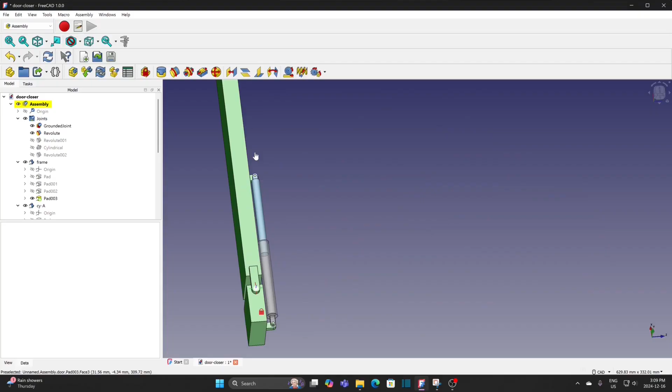This part will show how to create a door closer assembly. Create a new file, door closer.

In the assembly workbench, click the Create Assembly File icon. Now the assembly is active and the assembly heading is highlighted in yellow. Click the Insert Components icon to insert parts. Then click Open File and go to the directory where I save the parts. Holding the Control key, I can open all the parts files I need, or I can do it one by one.

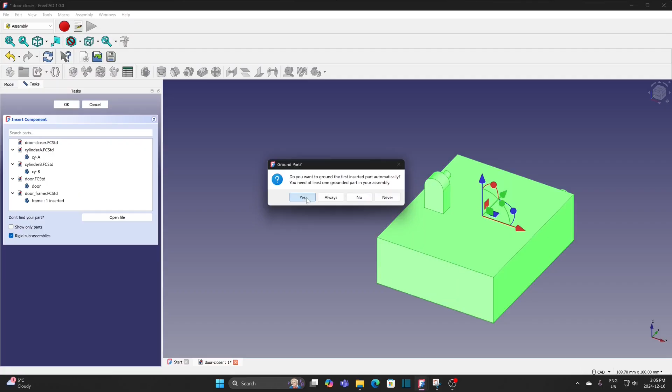Now all the files are inside the window. I select the first component and it will ask me if I want to ground the item. It is the same in A2 Plus Workbench, and I need to fix at least one component. So click Yes for now, and I can change it later if needed.

Then select the remaining items, or I can do it one by one so there will not be too many items at one time. Anyway, this is a simple assembly and I just insert them all at once. Now I can move the parts freely by the mouse. It is a good practice to save the file after I insert items. If I didn't, sometimes it may not work in creating the joint. Saving the file will update the link between files.

Select the circular edge on the door and the circular edge at the frame, select Revolute Joint. Use the arrow icon to flip the direction if needed, then click OK. The door can freely rotate. Make it to the 90-degree position.

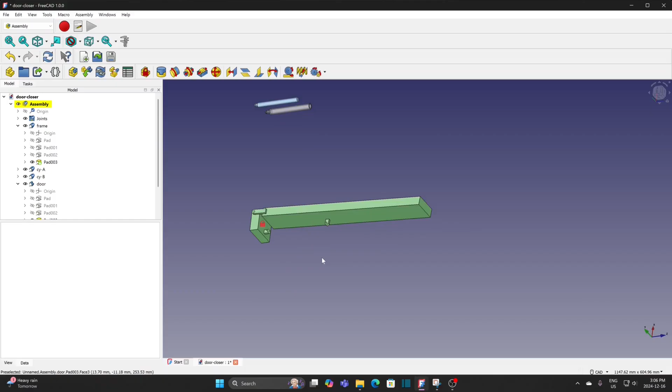Select the circular edge at the cylinder A and the frame, and create a Revolute Joint. Rotate the cylinder to the right. Insert the rod into the cylinder. I can use the circular edge or the circular surface to create the cylindrical joint, so the rod can slide and rotate inside the cylinder.

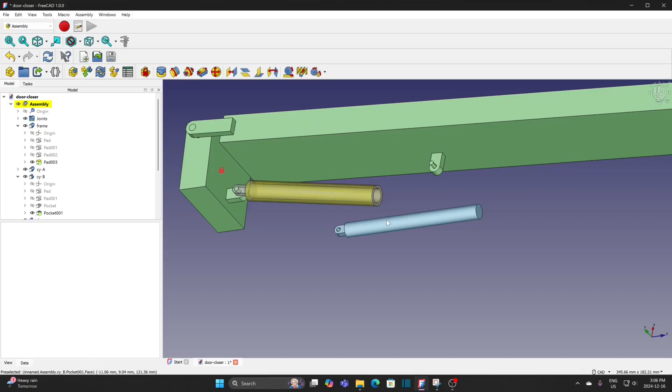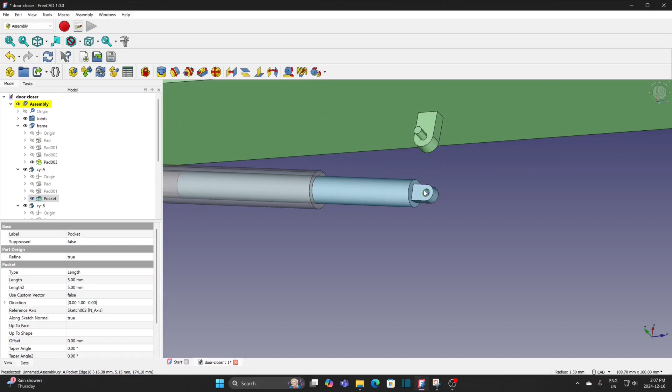Click the Cylindrical Joint icon. Use the arrow icon to flip it. I can slide the rod now. Select the circular edge at the rod and the door to create a Revolute Joint. When I move the door, the cylinder will move correspondingly.

Open the tree of the joint. The first, Revolute Joint, is the frame and the door. When I move the door, you can see the values in minimum and maximum are changing.

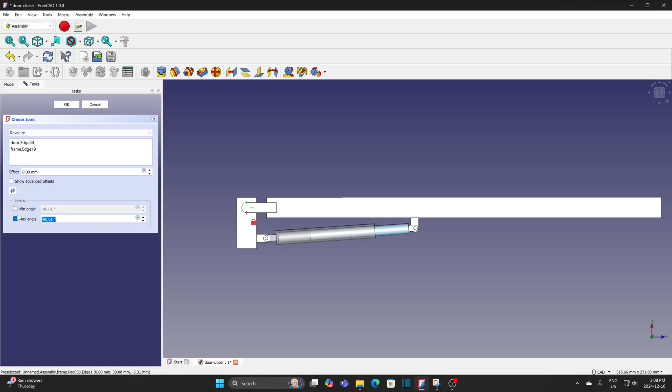Check the minimum angle and I cannot swing it outward, so this should be the maximum angle. So check the maximum angle and uncheck the minimum angle. Change maximum to -90 degree. Move the door outward and the minimum angle is changing. Check the minimum angle and change it to -180 degree.

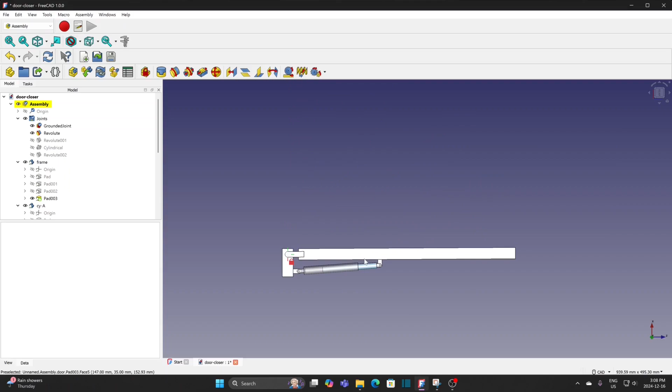Now the door can be moved within the defined range. This example is the basic operation of assembly in FreeCAD 1.0 with revolute and cylindrical joint.

The second part is to create a Scotch-Yoke assembly. Create a new file Scotch-Yoke. In the assembly workbench, create the assembly file, then insert components. Hold the Control key to select all the files needed, or you can do it one by one.

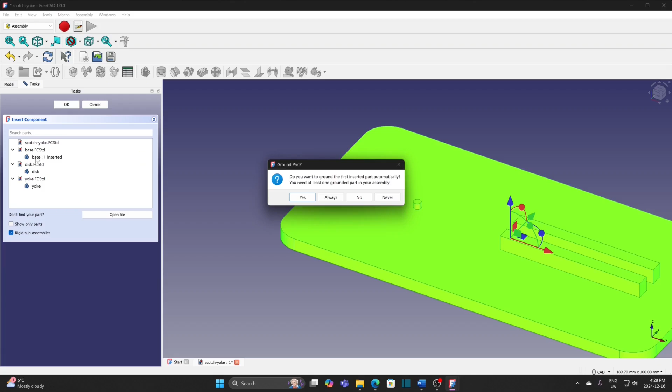I will fix the base, so I insert it as the first item to ground it to. Then insert the disc and the yoke. I can move the parts freely except the base, where you see a lock at the base indicating it is grounded or fixed.

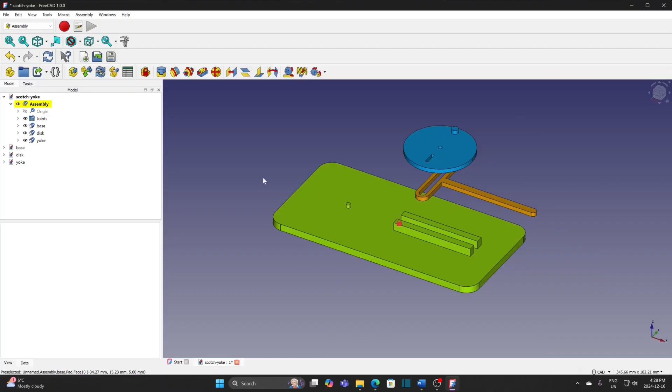The first joint is a slider joint. Select the edge of the yoke and the line at the base, click slider joint. The yoke can slide along the base, but no limit is set.

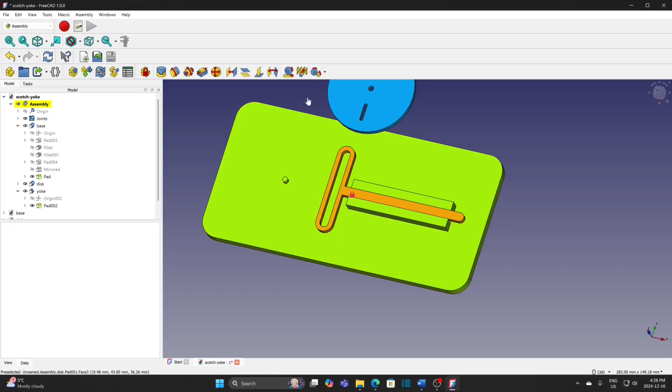Now set up a revolute joint for the disc. Select the hole at the disc and the circular edge of the pin, then select revolute joint.

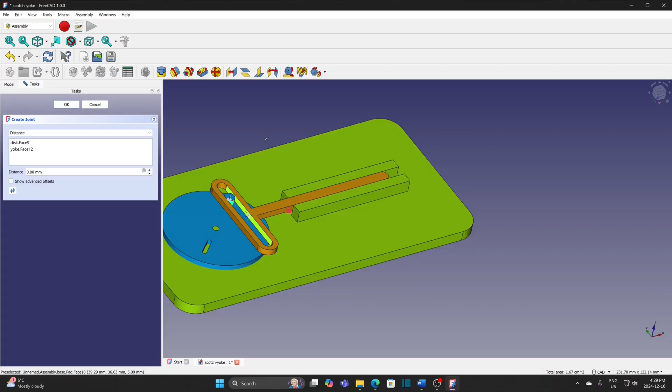Next step, to constrain the yoke to the disc, the pin can only move within the yoke. Select the circular side surface of the pin and the inside surface of the yoke, then create a distance joint. Set the distance as 0 so the two surfaces are touching. When I move the yoke, the disc will rotate.

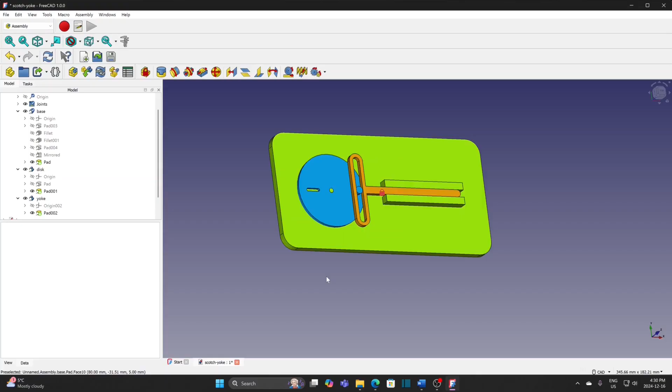When I rotate the disc, the yoke will slide. The operation is similar to A2 plus Workbench 2. I didn't set up the min-max for the slider, however the sliding range is limited by the disc, so I don't need to define the range. The Scotch-Yoke assembly is done, let me move to the next one.

This part is for Pinion and Rack. Create a new file for Pinion Rack. In the assembly workbench, create the assembly file. Insert components, open file, and go to the directory of parts. Select files needed.

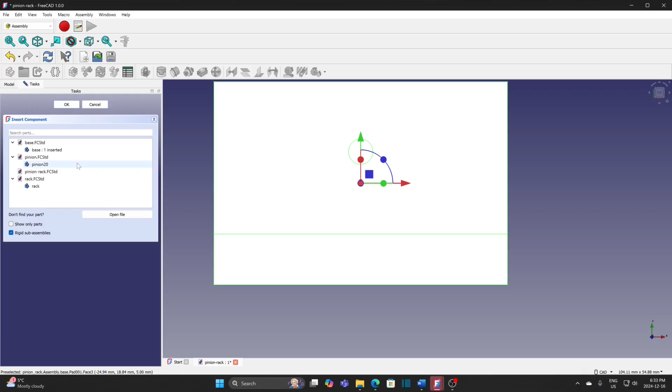Open the first file, which I plan to make stationary. Select the base, click Yes to ground the first item automatically. Insert pinion. Insert the rack.

Create revolute joint with the base and the spur gear. Select the hole and circular edge of the pin, click revolute joint. Select a line of the rack and the line at the base, then create slider joint.

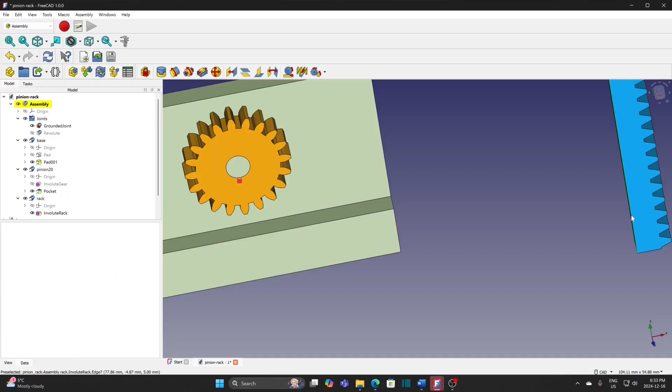Gears don't mesh. I can either slide the rack or rotate the gear to mesh them. Slide the rack to mesh the gears.

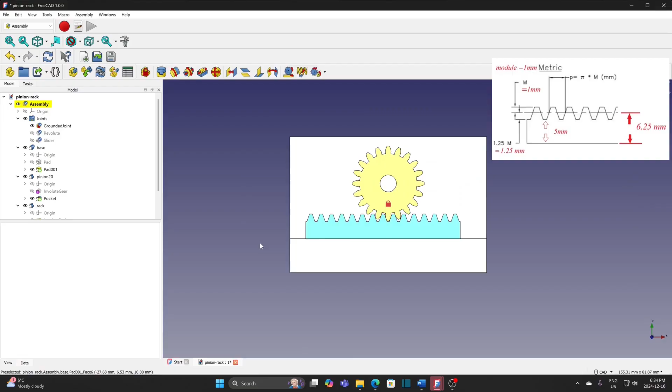The pitch radius of the pinion is 10 mm, the module is 1 mm. So a line 1.25 mm from the root of the rack should meet the pitch circle of the pinion. The base of the rack is 5 mm, so the imaginary line is 6.25 mm from the bottom. So the distance between the pin center and the platform for the rack is 16.25 mm.

Select the line at the rack and the hole of the gear to create a joint between slider joint and revolute joint, which results in the pinion and rack joint. The pitch radius refers to the pitch radius of the gear. In fact, I would say it is half the number of teeth of the gear, because with different modules the radius would be different, but the speed ratio of the gear to the rack stays the same.

In this example, I use 1 mm for the module, so it is 10 mm, or 20 teeth. Move the rack slowly. Now the gear and the rack mesh. We can also set up the min-max for the slider joint, which controls the range in the pinion and rack joint eventually.

In some cases, the rotation direction may be wrong. Open the data window of the pinion and rack joint, and change the distance to minus, which could reverse the direction.

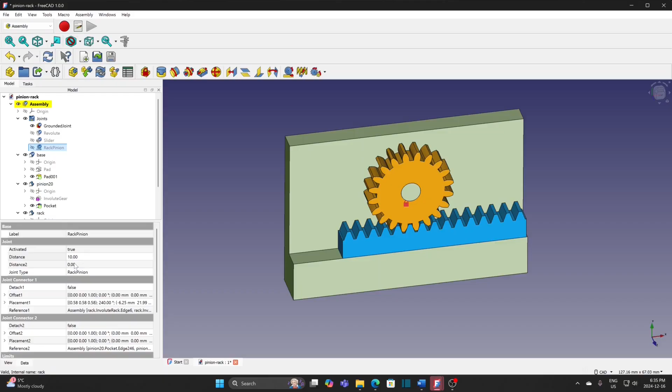This one is for spur gear. Create a new file. Within the assembly workbench, create the assembly file. Insert component, open file. Select parts file.

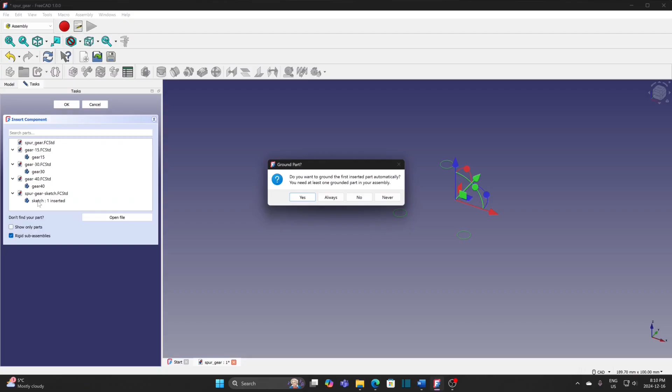Insert the sketch as the first item and make it fixed in position. Besides the 3D body, we can insert a sketch, using it to fix the position of bodies. Then insert 3 gears.

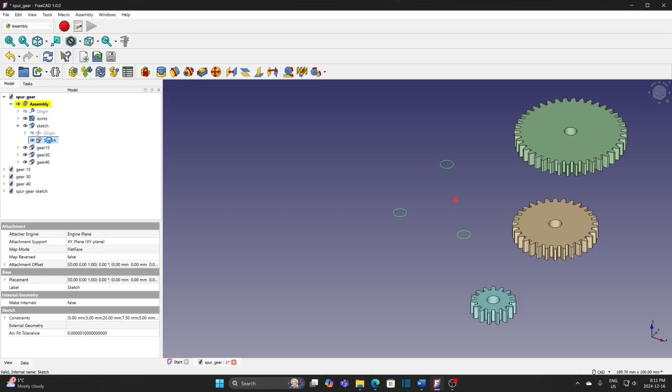Open the sketch and we'll explain the mounting distance between gears. The first small gear is 15 teeth, the second one is 40 teeth, and the third one is 30 teeth. I use 1 mm as the module, so the pitch diameters are 15 mm, 40 mm, and 30 mm. Mounting distance is the sum of the radius of 2 gears, so the first pair is 27.5 mm and the second pair is 35 mm.

Make sure the assembly is active, otherwise all the assembly icons will be grayed out. Double-click it or change it to active.

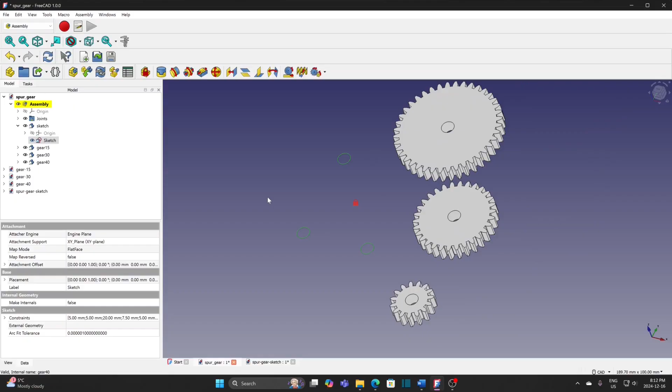I will create a revolute joint between the gear and the circle at the sketch. I can select the circular edge at the top or the bottom, just make sure it is consistent with all 3 gears. Select the bottom edge and the circle at the sketch, click revolute joint. Repeat it for the other 2 gears.

All the gears mesh, as gears will be inserted with the axis aligned with the axis of the sketch, and sometimes we don't need to adjust the angle. If it doesn't mesh, rotating the gear by half a tooth would usually work—that is 180 degrees divided by the number of teeth. But in this example, it is good to go to the next step.

Gear joint is to set up a relationship between two revolute joints, so select two revolute joints and define the gear ratio. Select the circle of the first gear and the circle at the second gear, click Gear Joint.

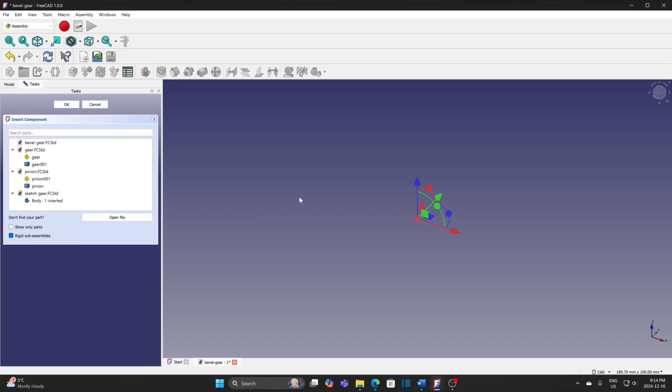Create a new file. Create assembly file. Insert components, open files of components. Insert the sketch first and ground this item. Insert the pinion and gear.

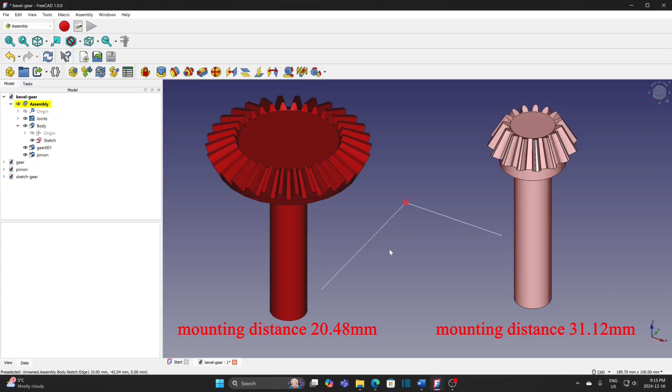The mounting distance of the pinion is 31.12 mm and 20.48 mm for the gear. If you want to find out details of getting the mounting distance of bevel gear, you can see bevel gear assembly 4 animation in my channel.

The length of the line is double the mounting distance, as I attach the gear to the center of the line. If the line is the same length as the mounting distance, I will attach the gear to the end of the line. Either way is fine.

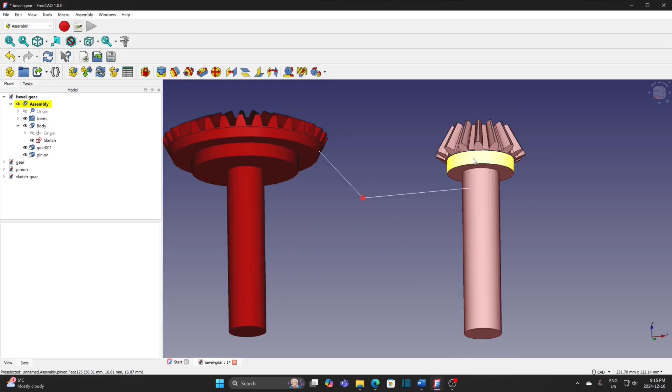Select the longer line and then select the circular edge of the pinion. Apply revolute joint. Same for the gear.

Select circular edge of the gear and then the pinion. Create gear joint.

Enter 30 for radius 1 and 15 for radius 2. These are the number of tooth.

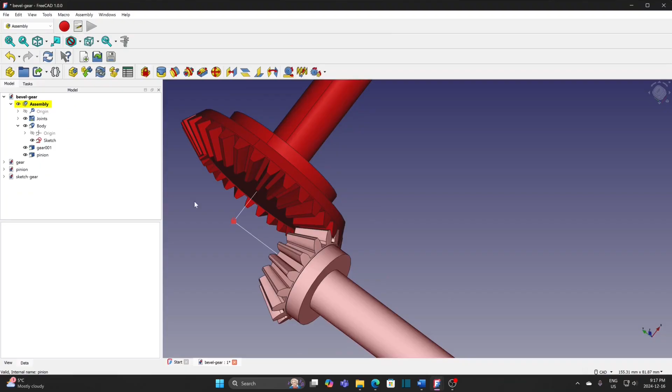The gears mesh. Rotate a gear to test it. The direction is wrong.

Go to the gear joint. Change distance to -30, which is radius 1. Direction should be correct now, but the gears don't mesh anymore.

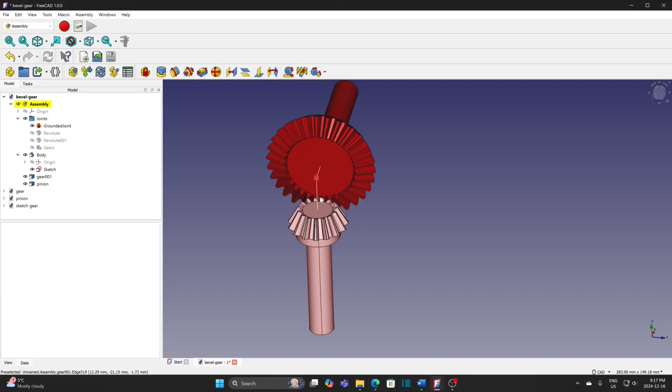Go to the first revolute joint, advanced setting. Rotate the angle. Because the gears rotate in the wrong direction and I cannot calculate the exact angle to fix it now, I will trial and error to get the correct mesh.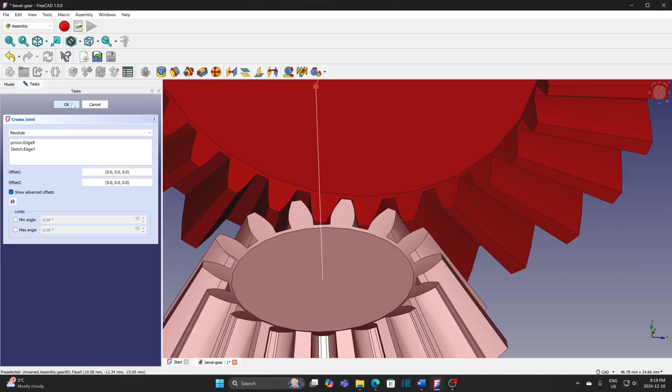Rotate a gear to test it. It looks okay. Hide the sketch and it is done.

Belt joint is to relate two revolute joints by the radius ratio, so basically it is the same operation as gear joint. Create a new file.

Create assembly file. Insert components. Open files of components.

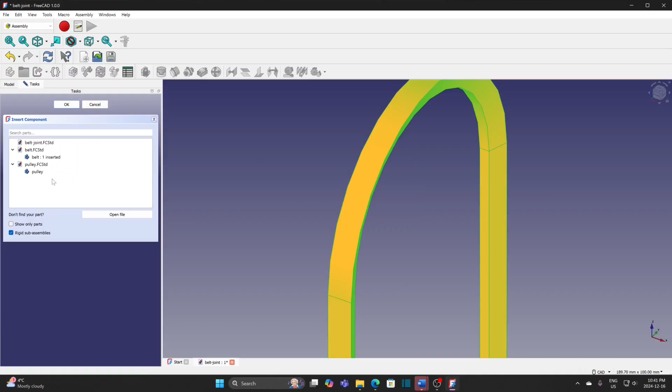Insert the belt first and ground this item. Insert the pulley twice, as I use two same pulleys for the example.

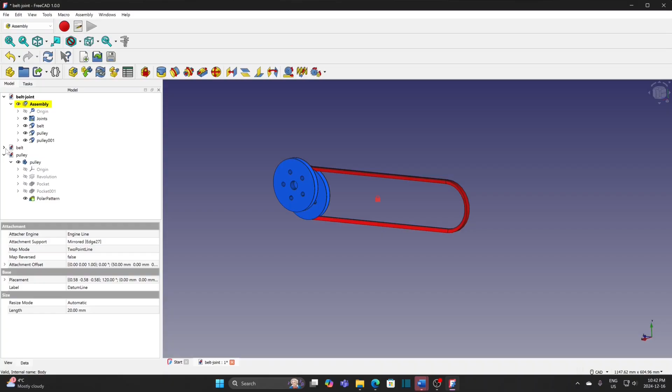As the pulley is a little bit bigger than the belt and the circular edges are not at the same plane, I can select the circular edge and adjust the position based on the dimensions of the belt and pulley. However, I can select the curved surface instead, so the belt will seat right at the middle of the pulley.

Select the inside curved surface of the belt, and then select the round surface of the pulley. Apply revolute joint. Do the same for the other pulley.

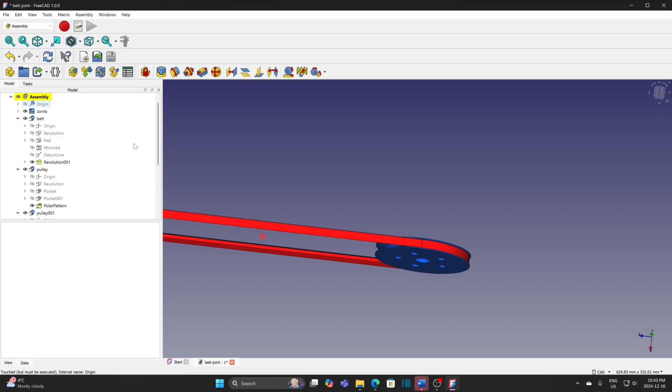Then select circular edges of two pulleys. Apply belt joint. Enter the value of radius 1 and 2.

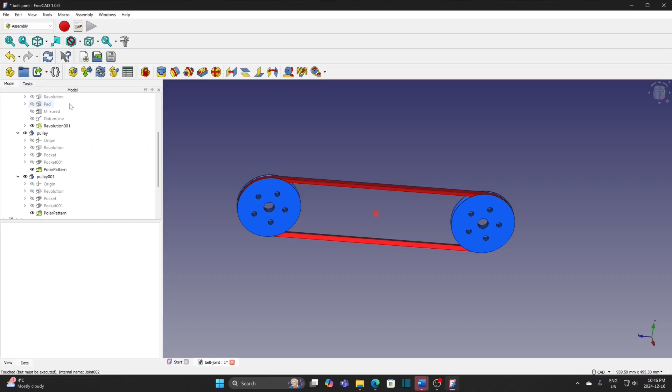Rotate one pulley will move the other pulley, and it animates a belt drive motion.

I will create a simple example for ball joint and it is similar to a hexapod. Create a new file.

Create assembly file. Insert components. Open file. Select components.

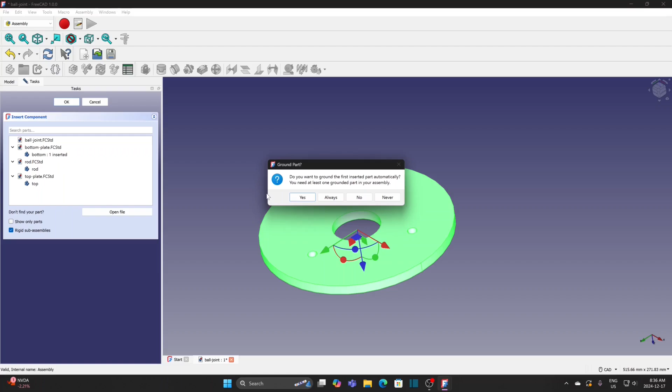Insert the bottom plate first and ground this item. Insert the rod 3 times. Then insert the top plate.

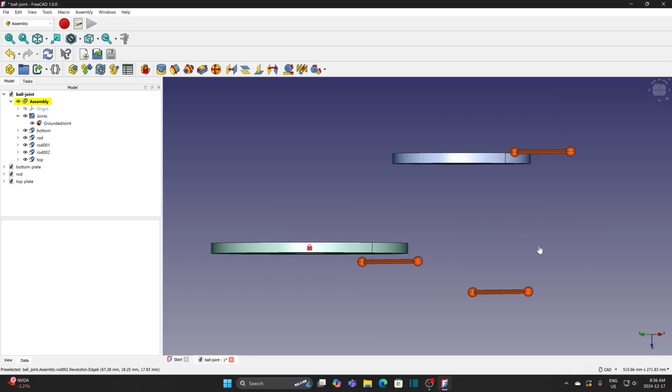Rotate the top plate.

Select the ball at the rod and the concave part at the bottom plate. Create ball joint. Do the same for other 2 rods.

Then create ball joints for the rod and the top plate.

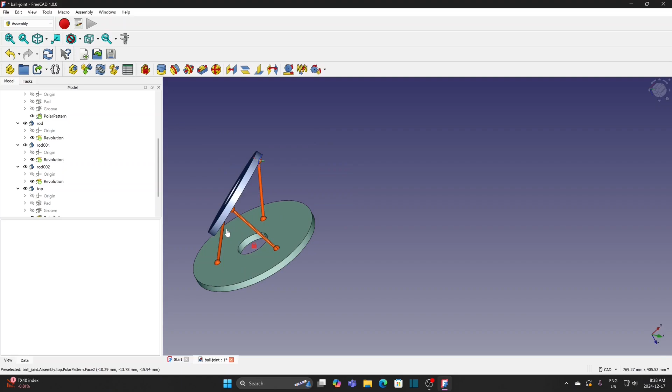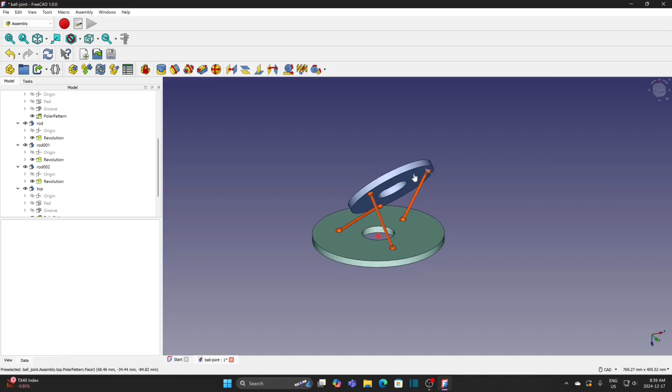All done. Move the top plate and we can see the movement of the rod. We can use this joint with 6 rods to create a hexapod, something like this.

This section is to create a linear actuator. A motor drives a threaded rod which in turn moves a block to the desired position. Create a new file.

Create assembly file. Insert components. Open file and select the motor and the base.

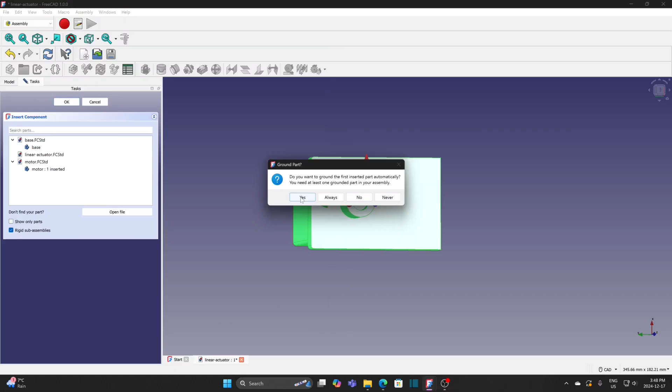Insert the motor as the first item and ground it. Insert the base.

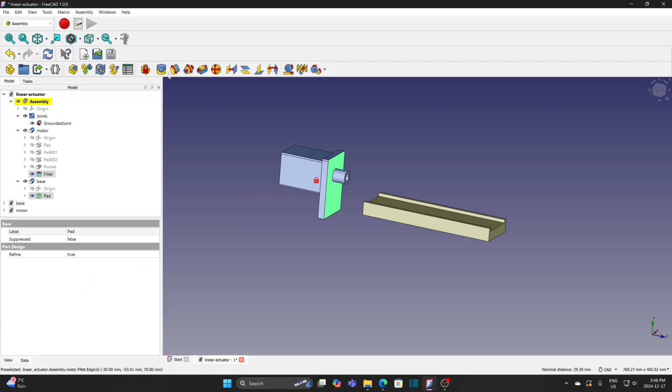Select the surface of the base and the surface of the motor. Create fixed joint. The base is fixed to somewhere at the center of the motor.

Show advanced offsets. Select offset 1 to open the translation tool window. We can use the translation tool to position the base. Adjust the distance at Y to align the base with the motor plate.

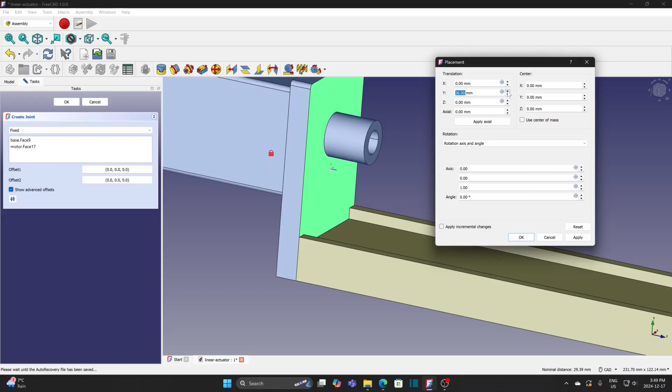Then insert the threaded rod.

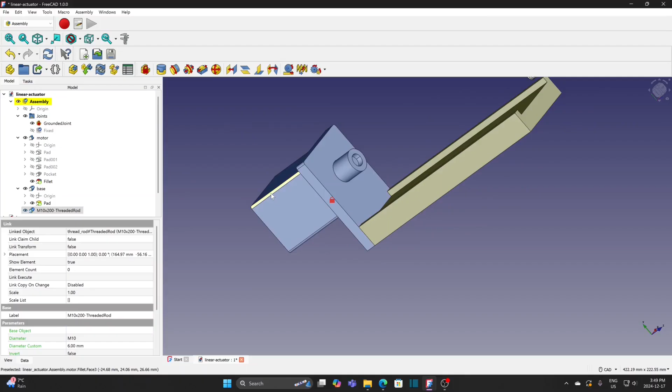Select the circular edge of the threaded rod and the circular edge of the motor. Create revolute joint so the threaded rod rotates at the motor.

Insert the motion block which is threaded at the hole. Always select the last item in the body, it is the cut for the motion block.

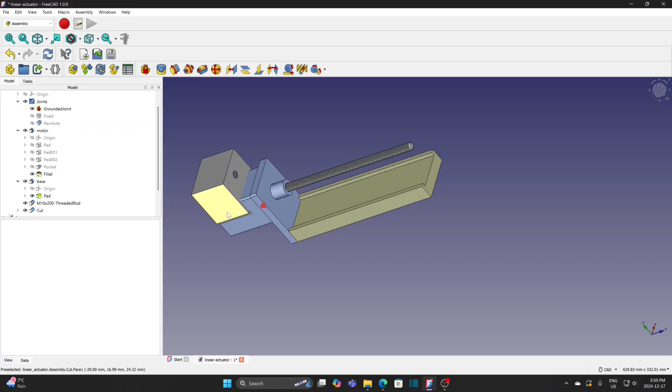Select the edge of the block and the edge of the base. Create slider joint.

The position is good and the threaded rod passes through the motion block at the hole.

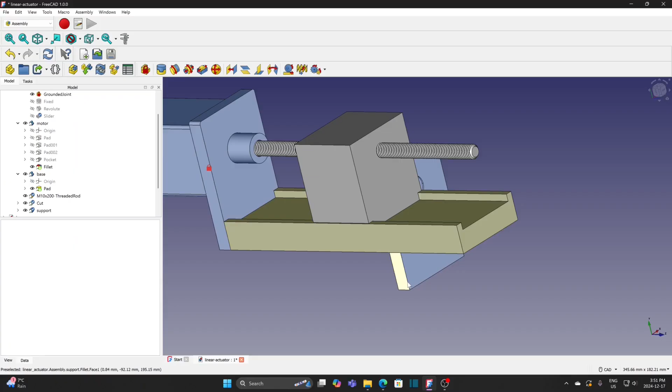Insert the support plate. Rotate the support plate.

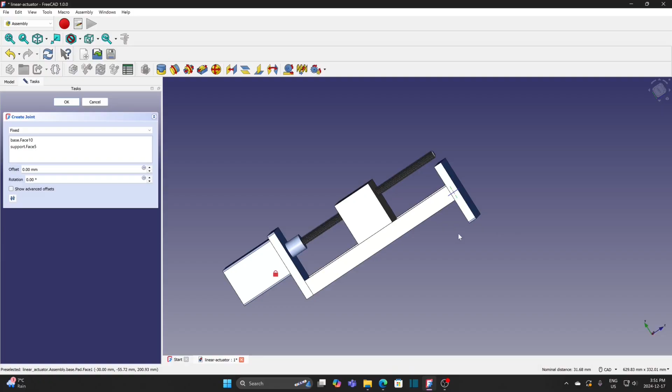Select the surface of the base and the surface of the support plate. Create fixed joint. The plate is upside down and attached to the middle of the base. We can fix both by using advanced offset.

Show advanced offset. Select Offset 1 to open the translation tool window. Change the angle to 180 degrees. And adjust distance in Y.

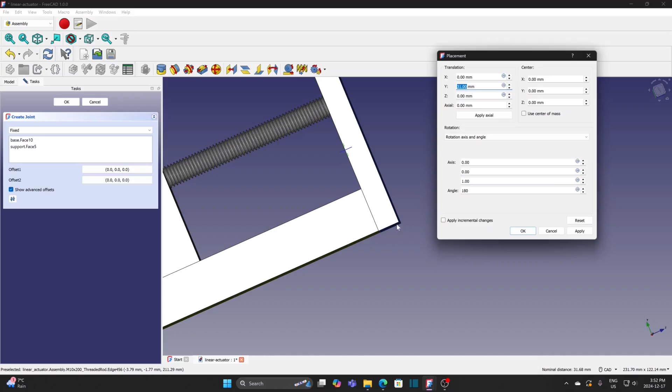Change the color of the block to amber. To create a screw joint, we need to relate the revolute joint and the slider joint.

Hide the support plate. Click the block, go to View, and change transparency to 80.

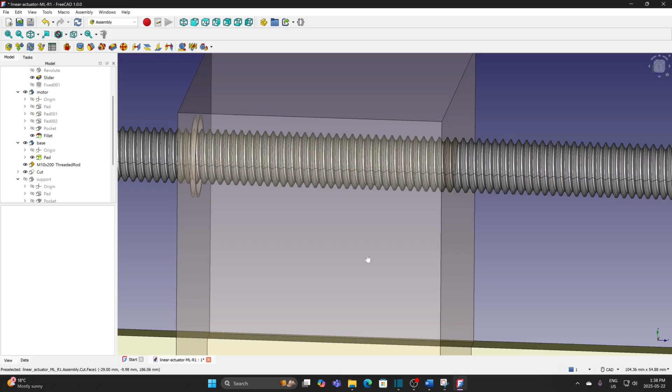Move the block to match the thread of the rod. Select the block and change transparency back to 0. Select the line at the block and the circular edge at the threaded rod, then create the screw joint.

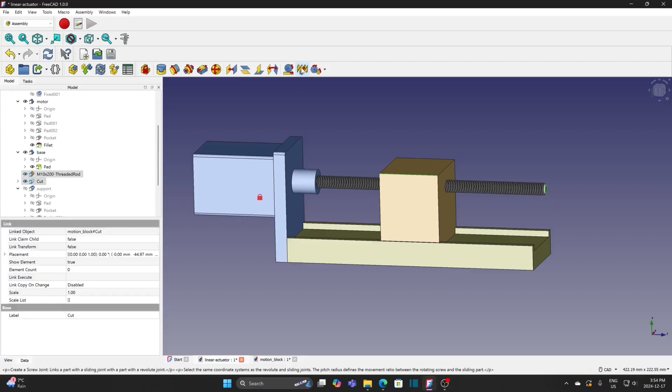The pitch radius is in fact the pitch of the threaded rod. It is the distance moved when the screw makes one complete turn. For M10 thread, the pitch is 1.5 mm.

Show the support plate. Move the block and you can see the threaded rod is rotating.

Open the slider joint. Move the block and the values in min-max are changing. Move it to the left and check the max length. Then move it to the right and check the min length. This is the range the block can move.

Zoom in on the threaded rod and you can see the rotation of the threaded rod. I can rotate the threaded rod to move the block, or move the block to rotate the screw. But in this example, it is easier to move the block to show the interaction between these two components.

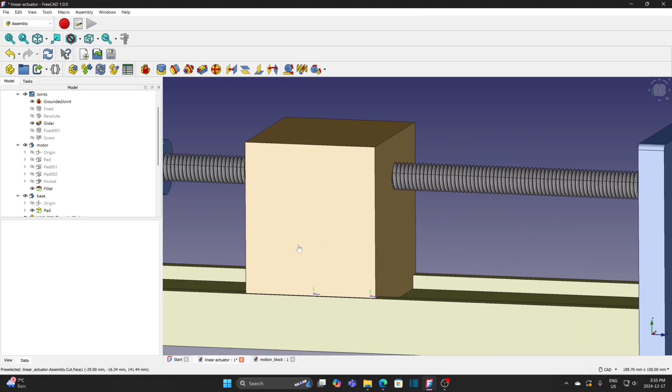This section is to demonstrate the distance joint. Create a new file.

Create assembly file, insert components, open file, select the block and the plate. Insert the board under the plate and ground this item. Insert the cube under the block twice.

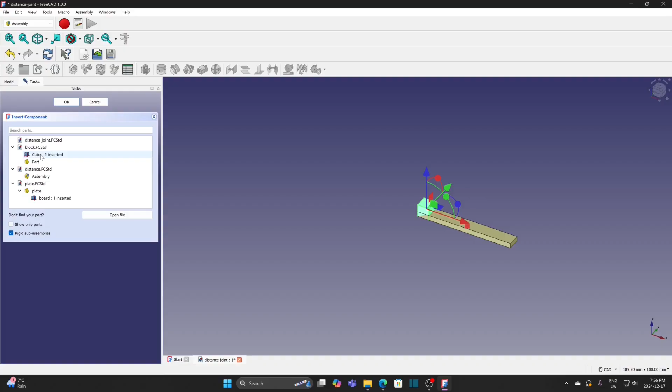Select the edge of the cube and the edge of the board, create slider joint. Select the edge of the other cube and the edge of the board, create slider joint.

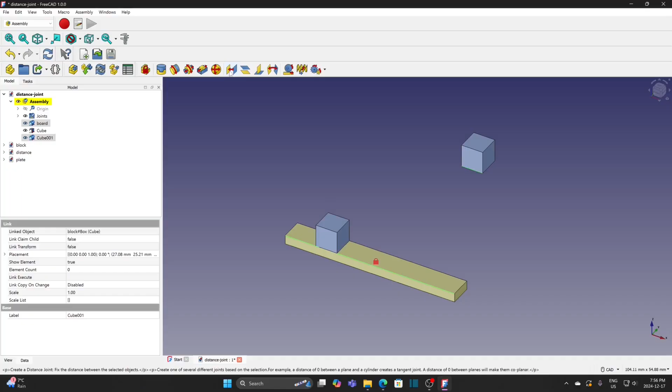Blocks can slide freely on the board. Select the surface of the cubes. Create distance joint, enter 6 mm for the distance.

Both cubes are jointed and slide together on the board, the distance between them is 6 mm. As in the Scotch-Yoke example, I also use distance joint for round surface and plane. The distance is 0, so they touch each other and slide. This is how the distance joint works.

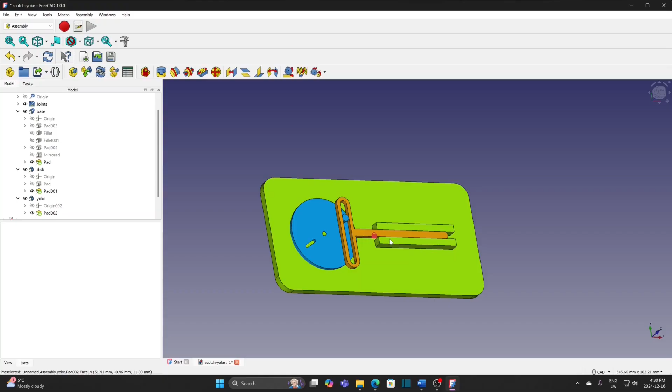I will use the ball joint example to demonstrate the parallel and angle joints in this part. Open the ball joint file which I have deleted the top plate from. There are a bottom plate and 3 rods, still connected by ball joints. Activate the assembly first, select the rod at the left and then the rod at the middle.

Create parallel joint. Now moving one rod will move the other rod too. They are parallel all the time.

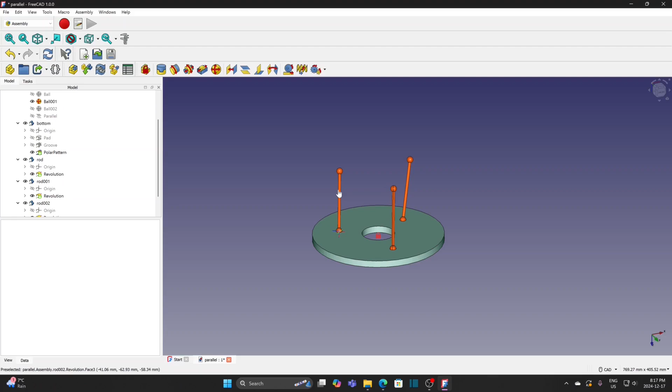Select the rod at the middle and the rod at the right. Create angle joint, enter 20 degree for the angle.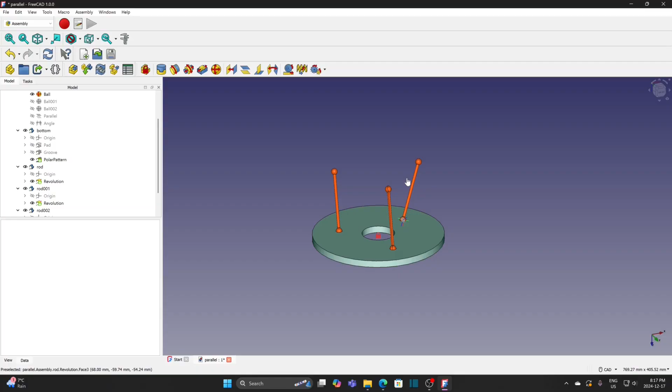If I move the rod at the right, the other 2 rods will move too. You can see the left one and middle one are parallel, and they are at 20 degree with the rod at the right.

This is how parallel and angle joints work. This part is to create a perpendicular joint. Create a new file.

Create assembly file, insert components, open file and select the sketch and the bar. Insert the sketch as the first item and ground it. Insert the bar twice.

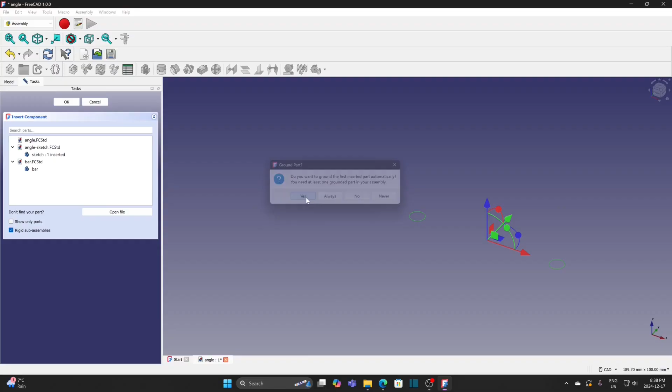Select the circle at the sketch and the top circle at the bar, create revolute joint. Select the circle at the sketch and the bottom circle at the bar, create revolute joint.

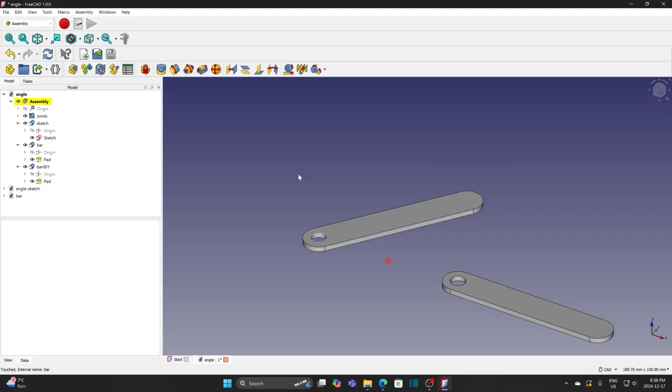Select the edge of the bars. Create perpendicular joint. Move one bar and the other bar will move too, always staying perpendicular.

Some more notes for the offset tool. Open the tree for the joint, open the revolute joint, click Show Advanced Offsets. Open offset number 1. We can move or rotate the item after inserting it, so adjust the values in X, Y, and Z to move the bar.

The right-hand column is to select the reference. The item can be moved by the center or by the center of mass. For me, the center should be fine for most applications. Accept the settings and test the joint again.

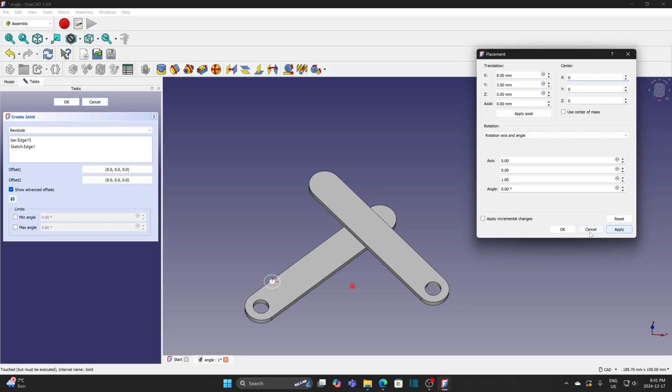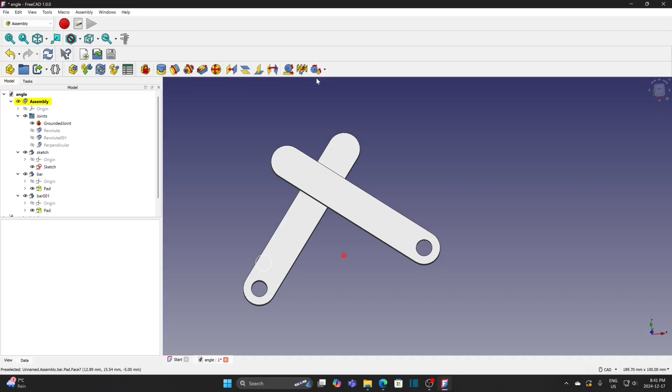All the joints created before are still valid. Basically, we have gone through all the joints. Let me do a quick review of the bill of materials and exploded view in this last section.

I will use the Scotch-Yoke mechanism file as an example. Activate the assembly first, click the bill of material icon, and open the bill of material.

Index is default and I will add the columns I need: name, description, and quantity, and click OK.

Nothing appears. Open the bill of materials again and add name, description, quantity, and a custom column, material, then click OK. Columns appear now.

Open it and export it, but only CSV option is available. I can import the CSV file by Excel, or I just type .xls and save it. Then open the file and save it as Excel, and it is finished.

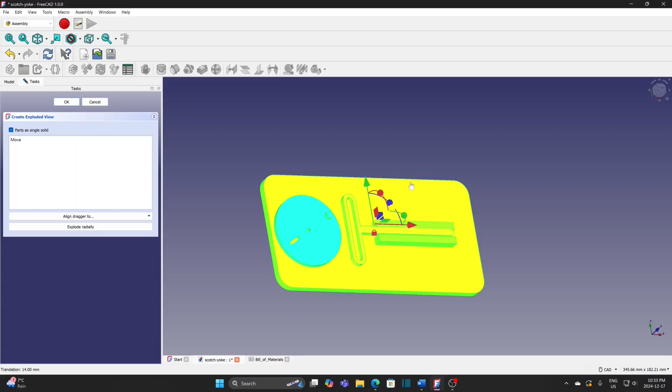With the exploded view function, click the exploded view icon. Click explode radially and drag one of the arrows to explode the parts. Then click OK.

Go to the exploded view at the bottom, open the view to see it again. To explode the parts further, click the part and the transform tool will appear. Move the part to a new position. Select another part, move it and rotate it.

Click OK. These steps are stored in the exploded view. Select the view and you see the path and the final position of the part. You can move, rotate, or move it on a plane again.

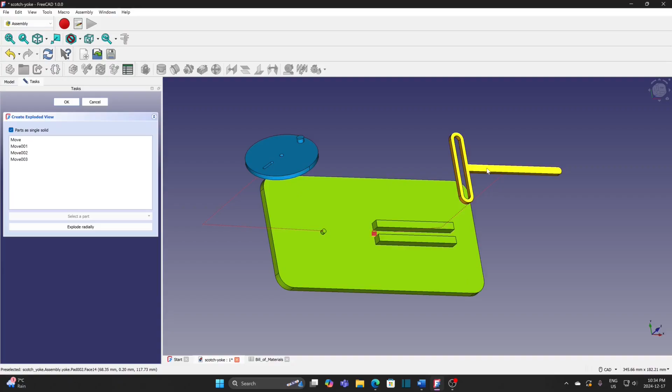It is basically how the exploded view works in the assembly workbench.